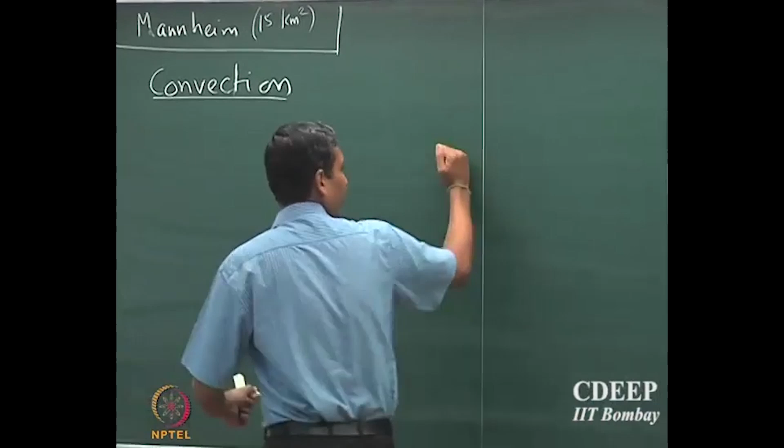Okay, so we've been discussing convection, let's catch up a little bit and then proceed further. We stopped by observing some of these dimensionless quantities. We've been discussing the analogy between different transport processes.

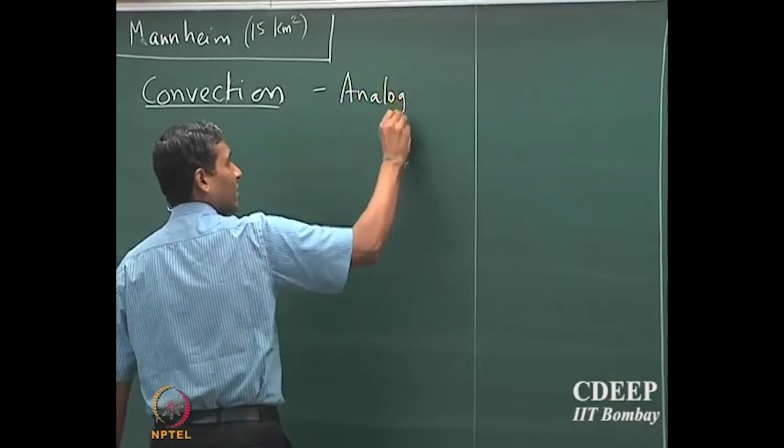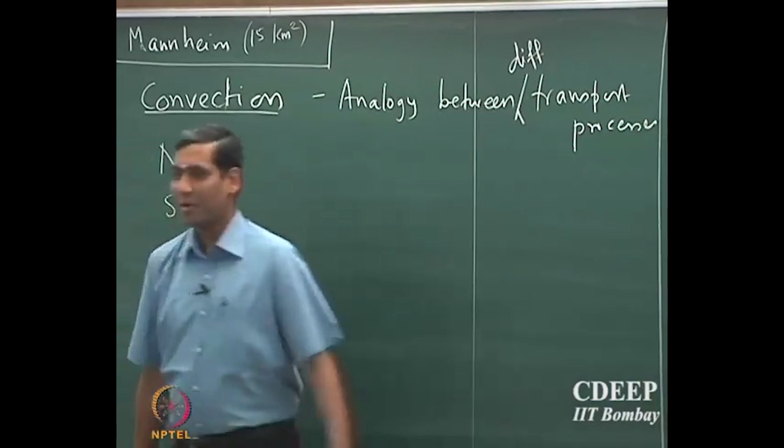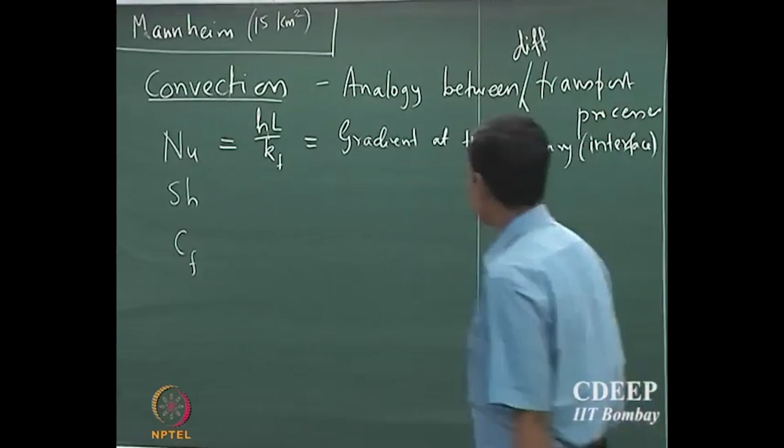So we said that we define Nusselt number. Does anyone remember? hL by k. What's that? No, it's not—it's a positive quantity. What is it? It's the gradient at the boundary—I should rather say interface. It reflects the gradient at the interface. Okay, and similarly we could write the concentration gradient at the interface.

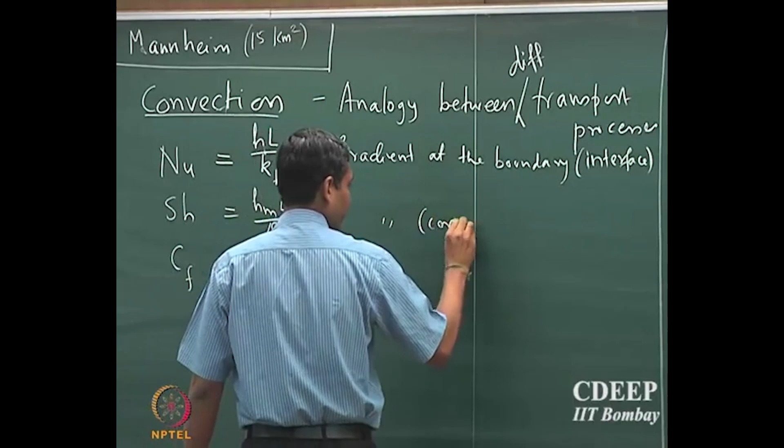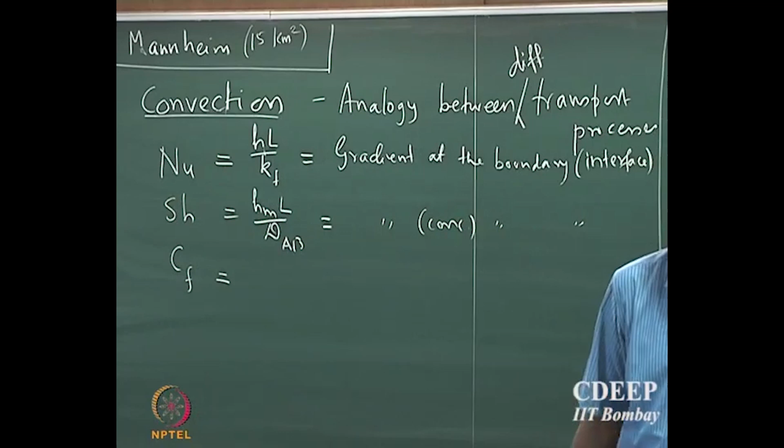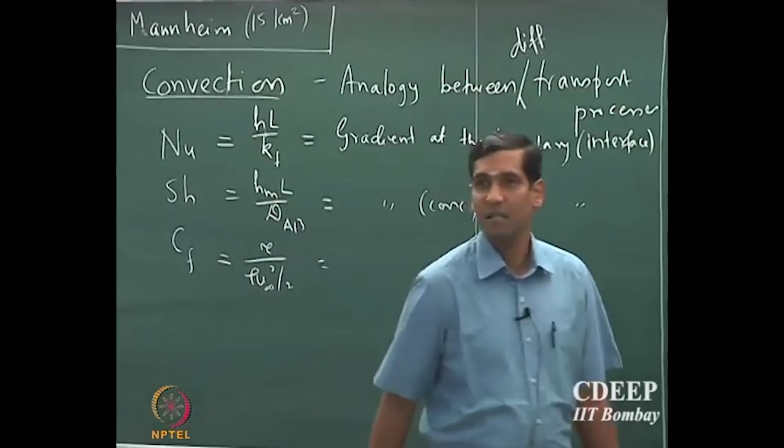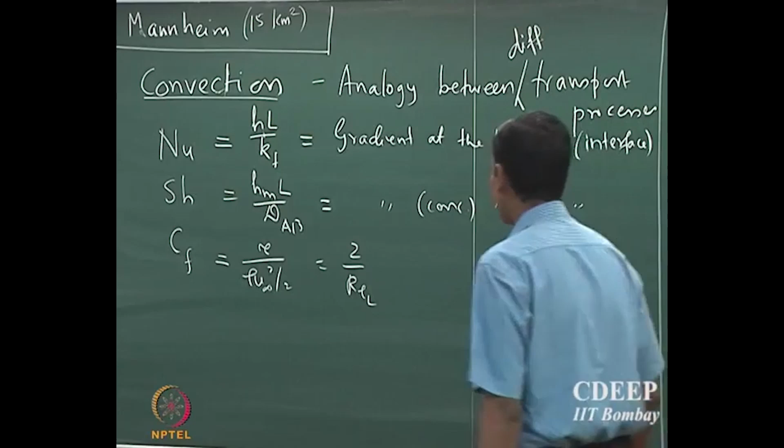What about Cf? Yeah, tau by rho u square by 2, and that will be 2 by Reynolds number multiplied by velocity gradient at the interface. Okay.

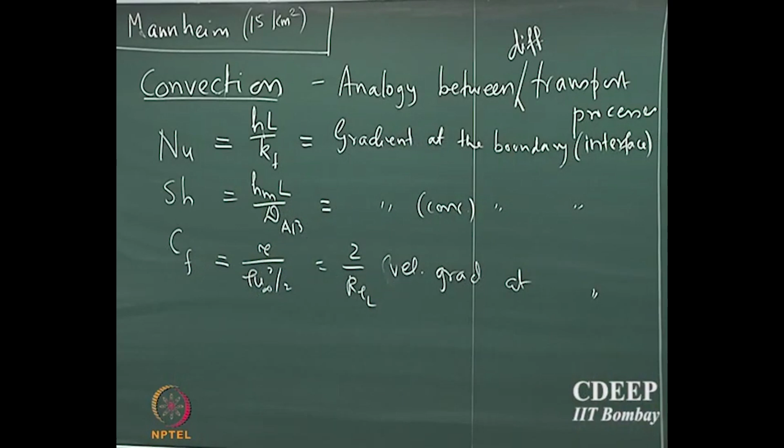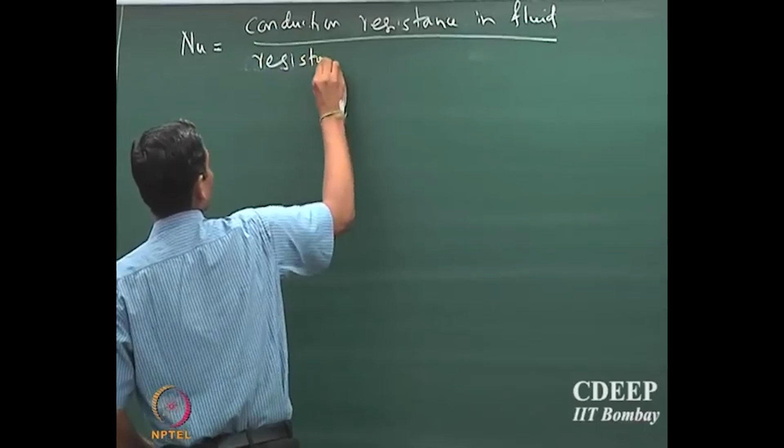But we also defined this as the ratio—Nusselt number is a ratio of conduction resistance in fluid divided by resistance to convection at, or rather across, the interface, because you are really looking at transport across the interface. And similarly, one could have a definition for Sherwood number—we will not get into that, it's anyway similar.

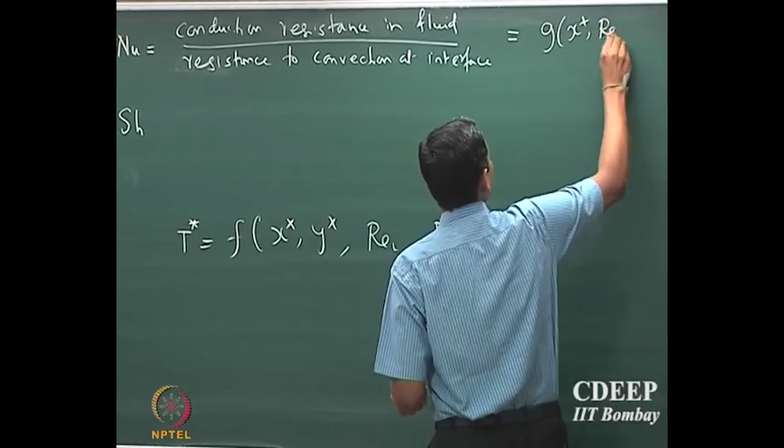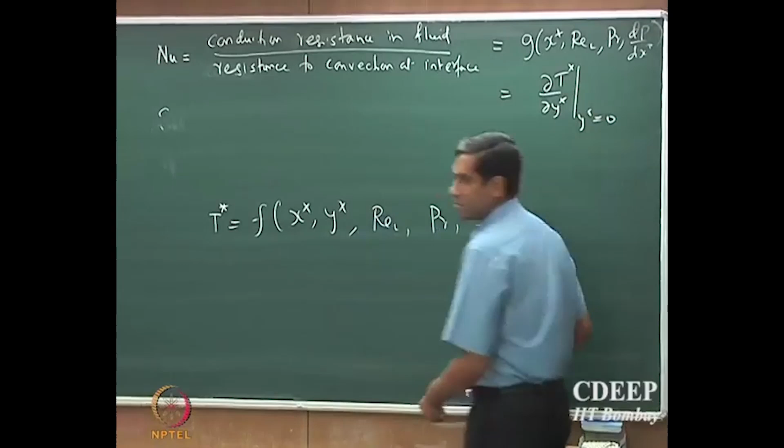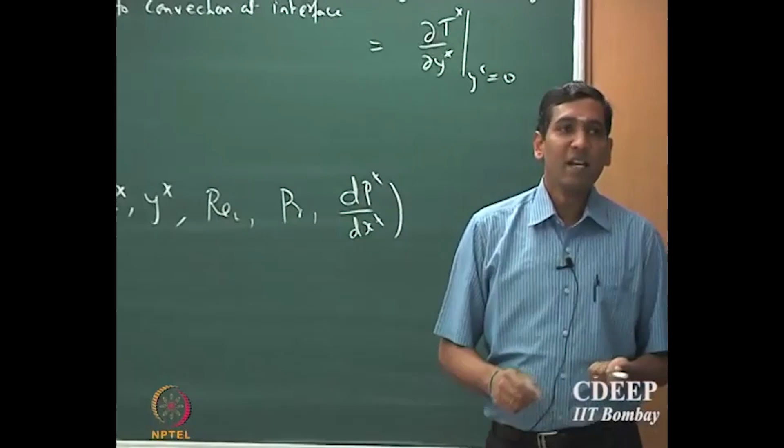Now, we also said, what is the functional form of Nusselt number? Remember we said the dimensionless temperature T star is a function of x star, the position inside the boundary layer, Reynolds number, Prandtl number, and the pressure gradient, which is typically a constant. So Nusselt number will be a function of x star, Reynolds number, Prandtl number, and dP star by dx star, because it is evaluated at the boundary—you take the first derivative. So this is nothing but dT star by dY star at Y star equal to 0. So the Nusselt number is not a function of Y position anymore, it is only a function of X position, because you are interested in the gradient at the interface, which is Y star equal to 0.

Okay, so what we are going to see today is—so far we have not solved any equations. The question is, can we get any further insights without solving the equations? We have to solve them eventually, but we are going to first try to extract as much information as possible before solving the governing equations.

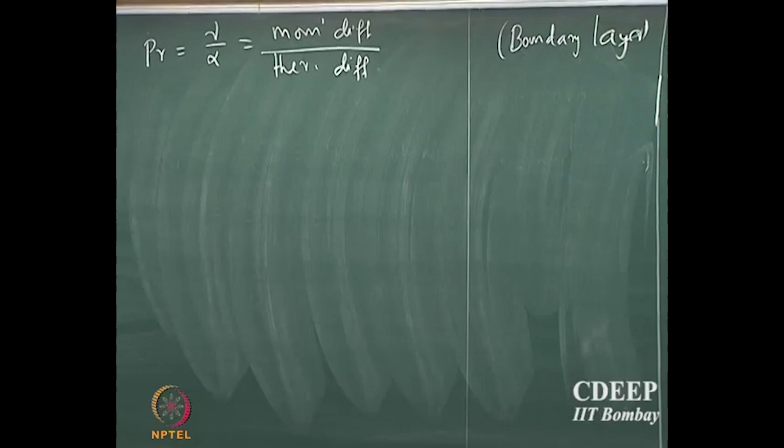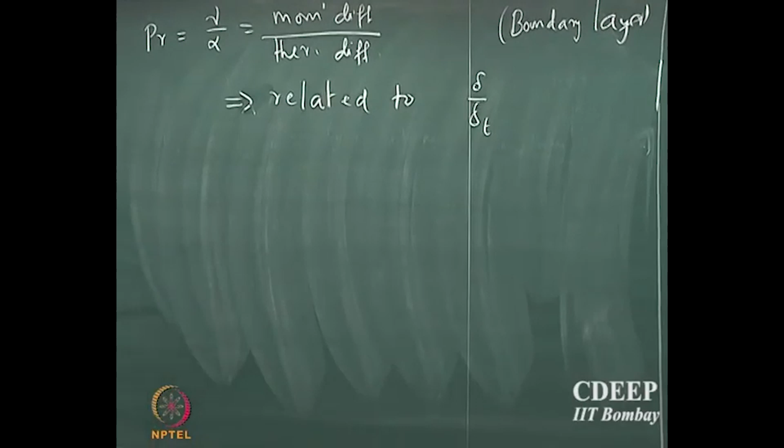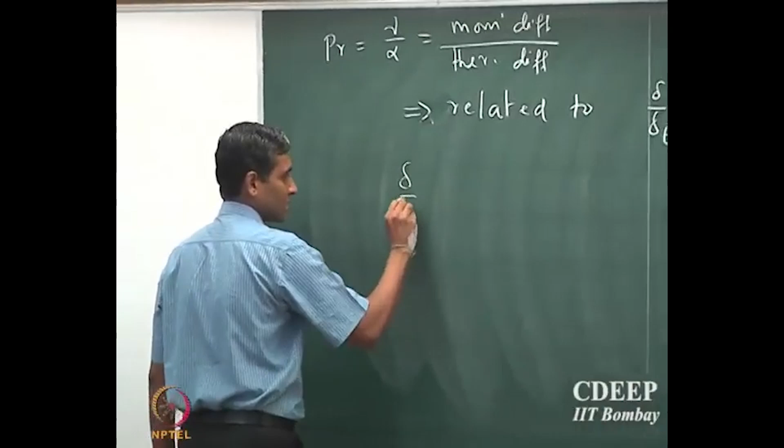So the first observation is that the Prandtl number is a ratio of nu over alpha, which is the momentum diffusivity divided by thermal diffusivity. Now, note that all of these are happening in the boundary layer, right—you are looking at characterizing the process in the boundary layer. So the momentum diffusion and thermal diffusion have to somehow be related to delta, the boundary layer thickness. The momentum diffusion is occurring in the boundary layer, and it has to be a function of the boundary layer thickness, and the thermal diffusivity has to be a function of the thermal boundary layer thickness, because that is the domain in which these two processes are occurring. So therefore, this is the general functional form.

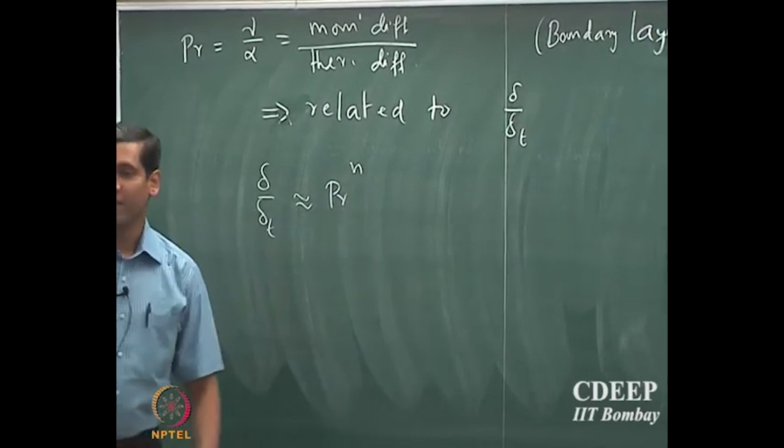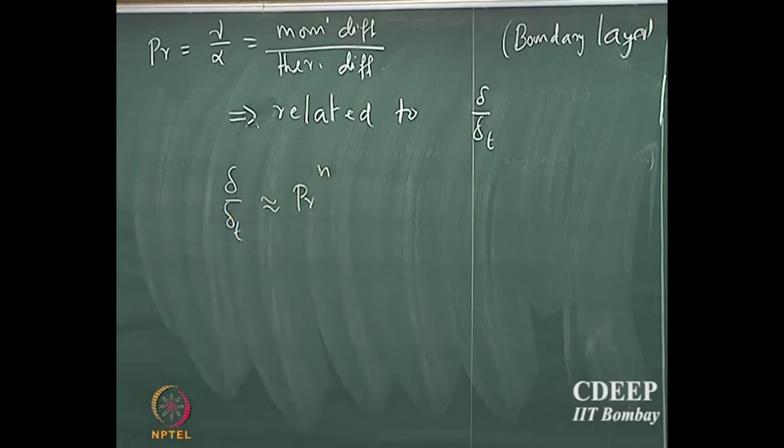We do not know what that n is till now, we are going to figure that out while we discuss different aspects of convection. So, it is safe to assume that the ratio of the momentum boundary layer to the thermal boundary layer thickness scales as Prandtl number to the power of n. Okay, we still do not know what that n is. In fact, some of you who have already done this laminar and turbulent flow experiment in the lab, you must have seen some exponent like this, and so we are going to see what that exponent is. Similarly, one could express delta by delta C as Schmidt number to the power of n.

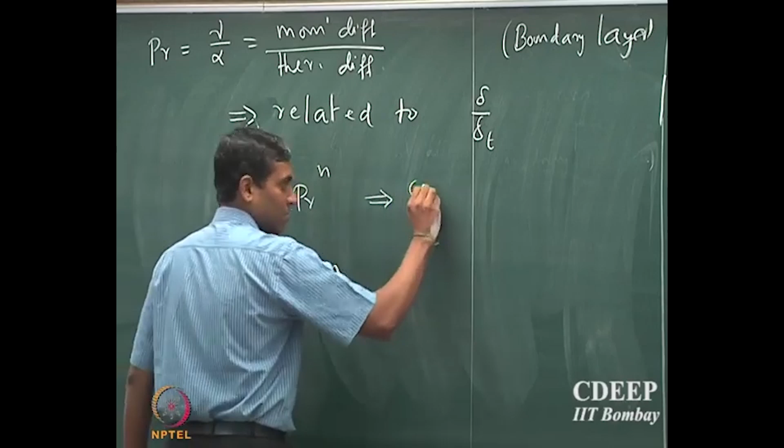So, this also provides a method to compare the boundary layer thicknesses, and same here, right. So, immediately I could take a ratio of these two, okay. I can say Prandtl number to the power of n, Schmidt number to the power of n. So, that goes as delta C by delta T.

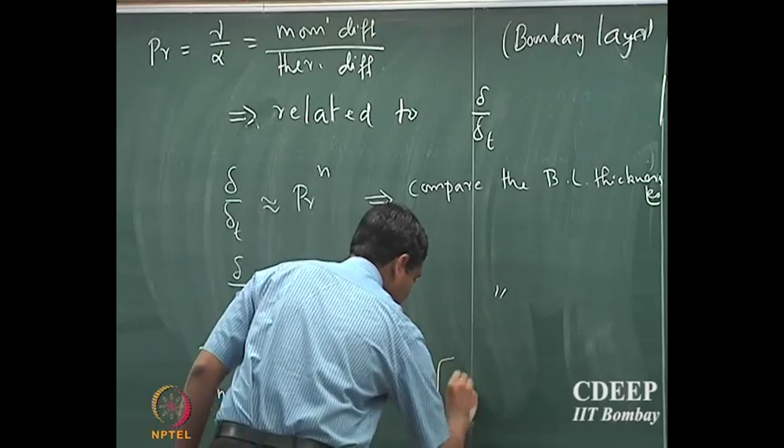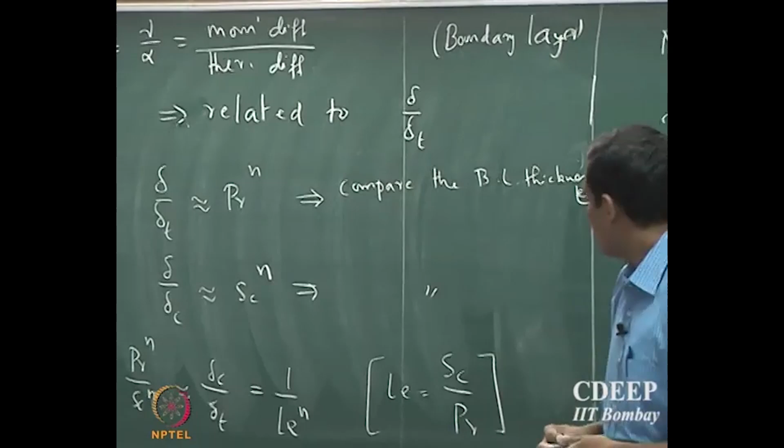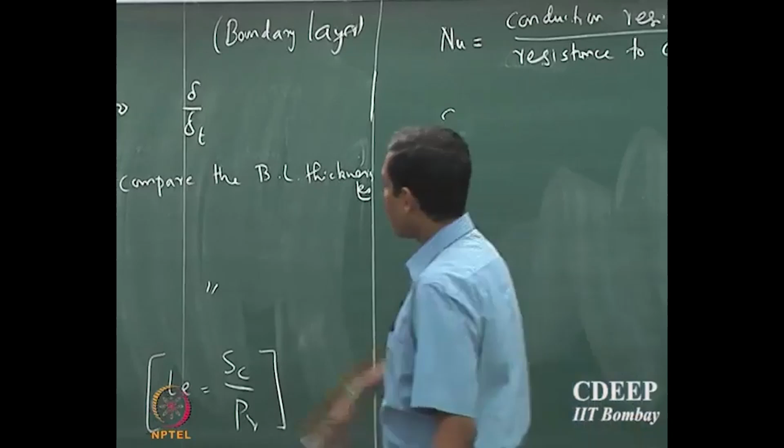Let me make sure I get the numbers right. That is called Lewis number. Okay. So, Lewis number is defined as Schmidt divided by Prandtl number. So, if we define a new number called Lewis number, what would be the definition for Lewis number? So, remember Prandtl is momentum by thermal diffusivity, Schmidt number is momentum by mass diffusivity. So, Lewis number will be thermal by mass diffusivity, okay. So, that is easy to see that.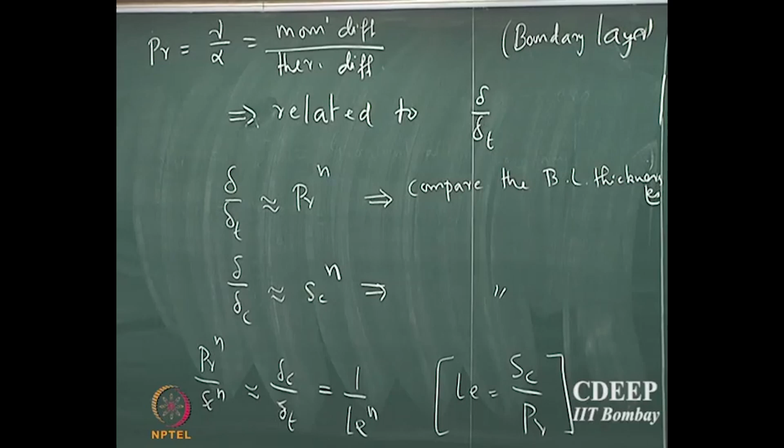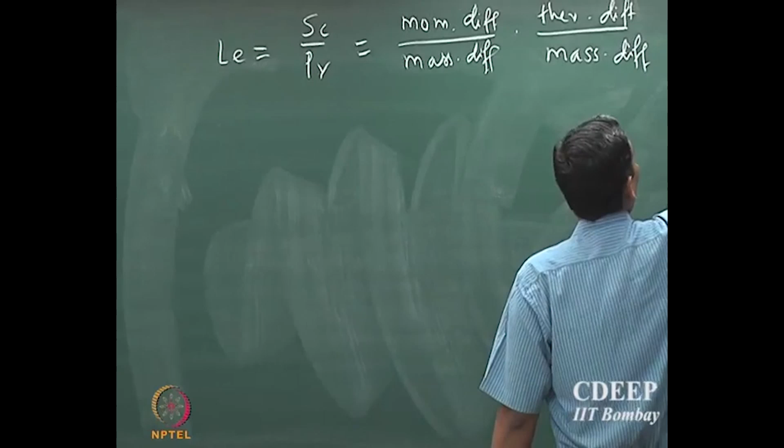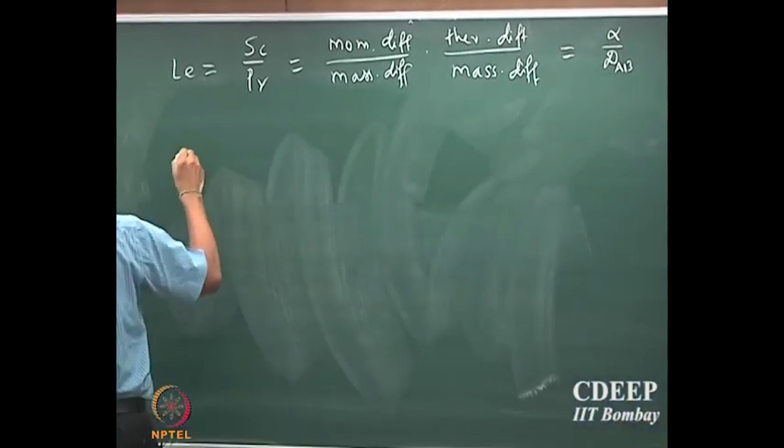So, Lewis number is given by momentum diffusivity divided by mass diffusivity multiplied by thermal diffusivity divided by mass diffusivity. And so, that will be alpha by DAB, where alpha is the thermal diffusivity of the fluid that you are considering, and DAB is the equimolar mass diffusivity of the species that is diffusing in that particular stream. So, really what we have found is that Lewis number, Prandtl number, Schmidt number and Reynolds number, okay. That is based on the length of the plate, because we have looked at flat plate, you could always consider other geometries. So, these 4 numbers essentially characterize the diffusive properties of all 3 different transport mechanisms.

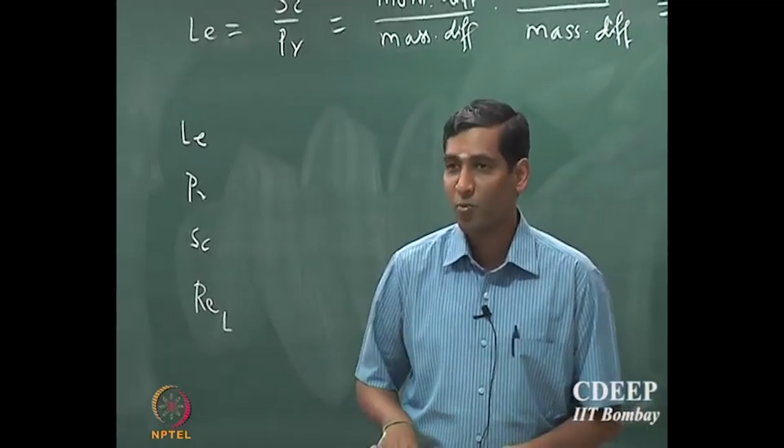So, you get a way by which you can compare all of these, which means that if you know one of them, if you know Lewis number, there has to be some relationship between the heat transport and the mass transport processes. Each of these numbers, Prandtl, Schmidt and Reynolds number, they independently characterize each of the transport processes. So, this characterizes the thermal transport or the heat transport processes. This characterizes the mass transport process, and this characterizes the momentum transport process.

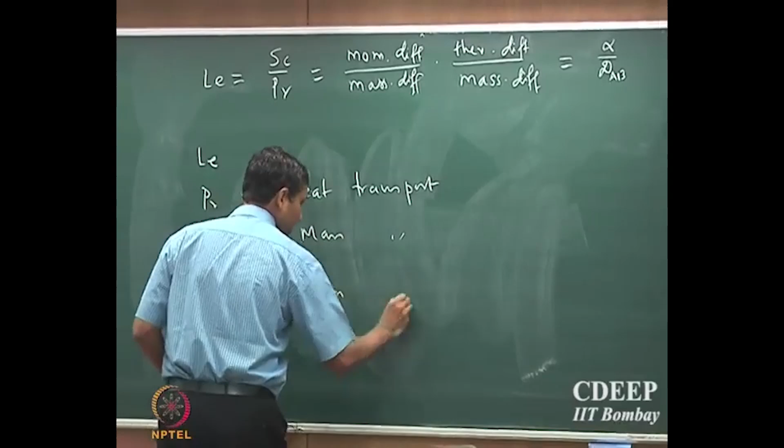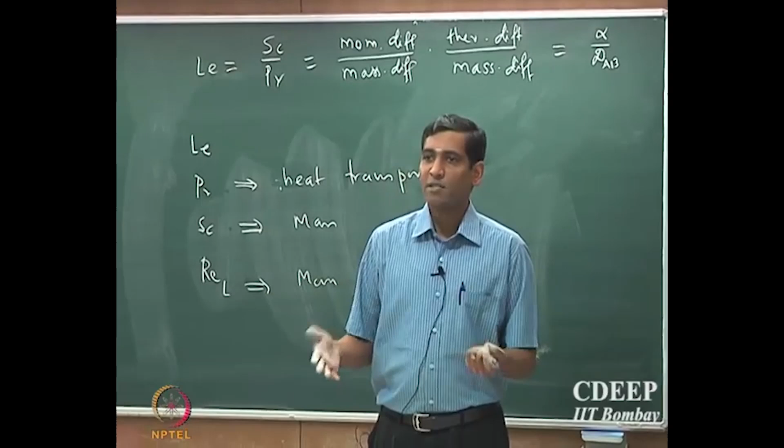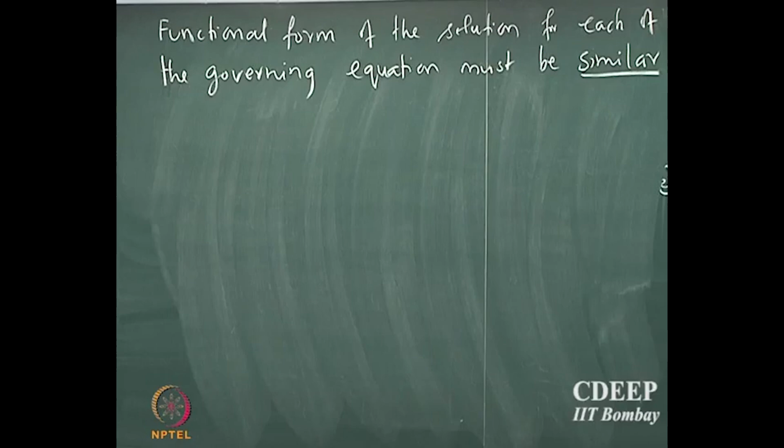Now, you may also recall that the governing equations that we wrote for these 3 transport processes, if we introduce the boundary layer approximation, they all look similar, right. They all have same terms, they have a convection term, they have a diffusion term, plus the momentum boundary layer equation has a constant, which is the pressure gradient. So, the functional form of the solution must be similar. Okay. So, it is very important to understand this, it is not same, it is similar, okay, because the momentum boundary layer equation does not depend upon the concentration and temperature, while the concentration and thermal boundary layer equations, they depend upon the velocity, although their functional form is same.

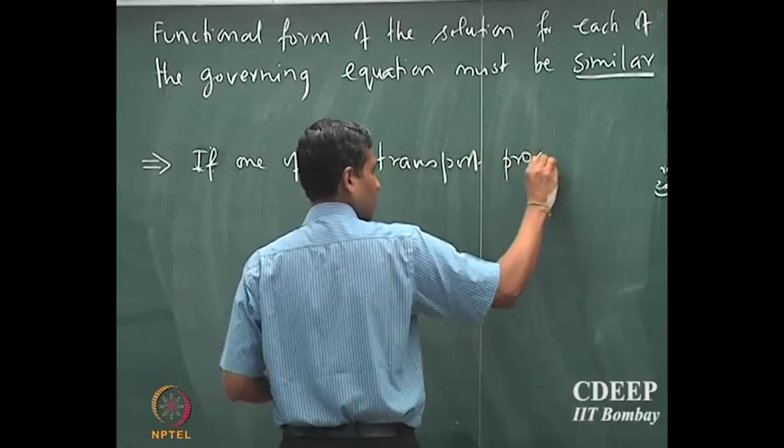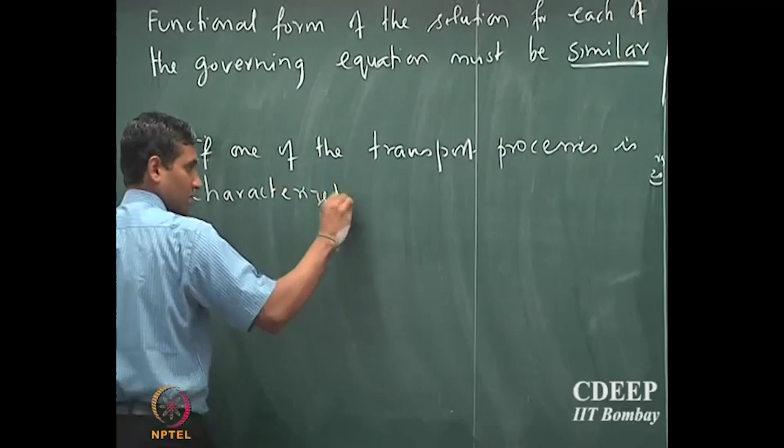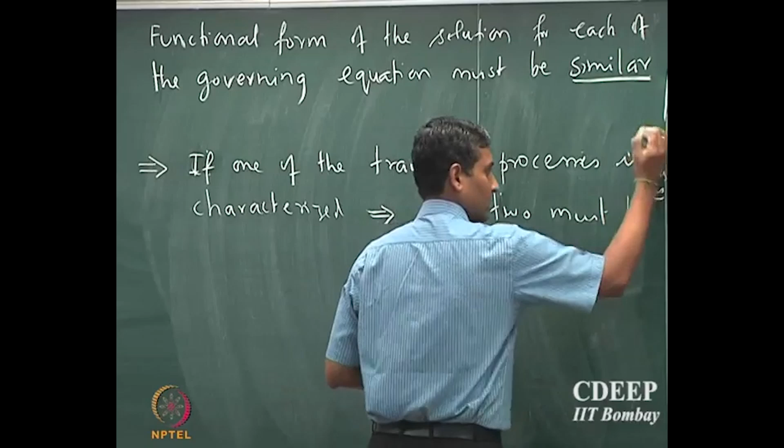So, therefore, the functional form of the solution that you get, they have to be similar to each other, which also implies that if one of the processes is characterized, then the other 2 must be similar, okay. So, that also means that because the functional form is same, if one of the transport processes is characterized, if I know how to solve one of them and I found the functional form and I found these dimensionless numbers, then I'm done. I should be able to find the solutions for the other two. Okay. So it is this property which leads to the concept of the boundary layer analogy.

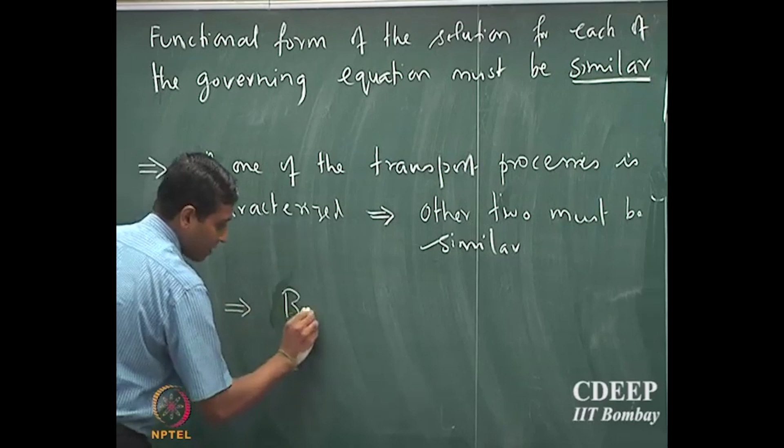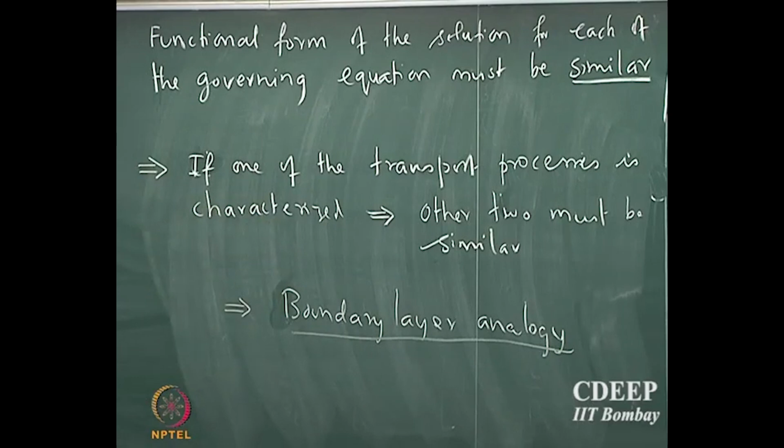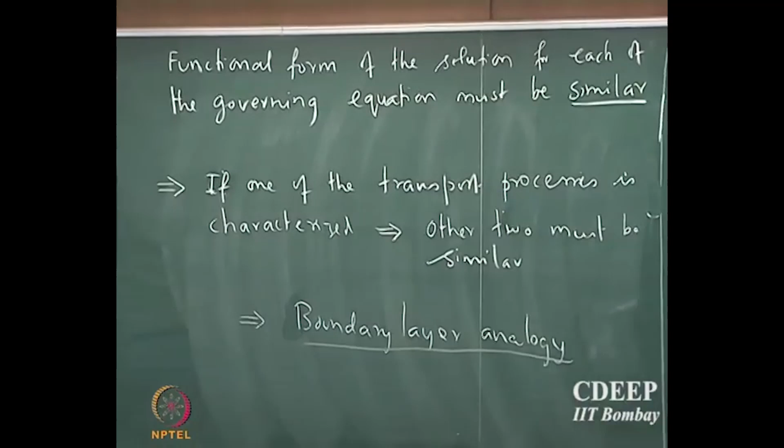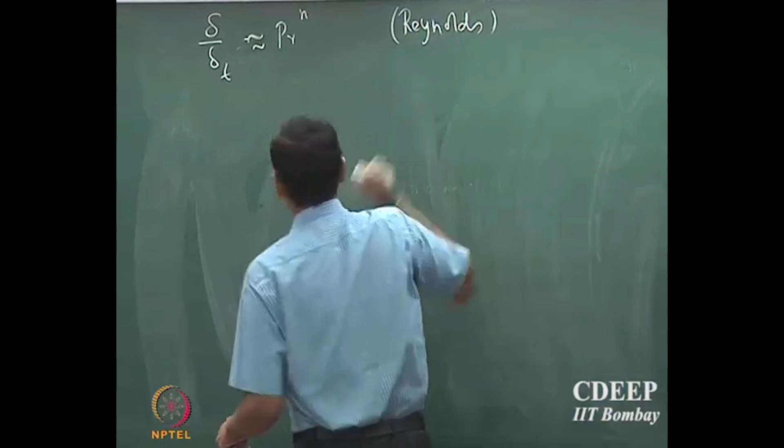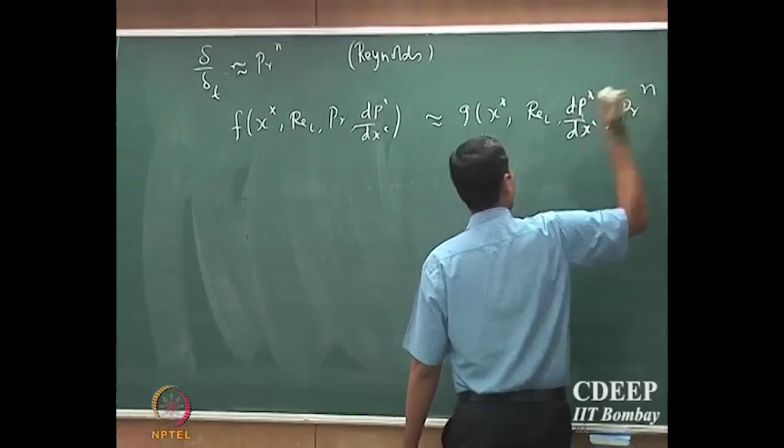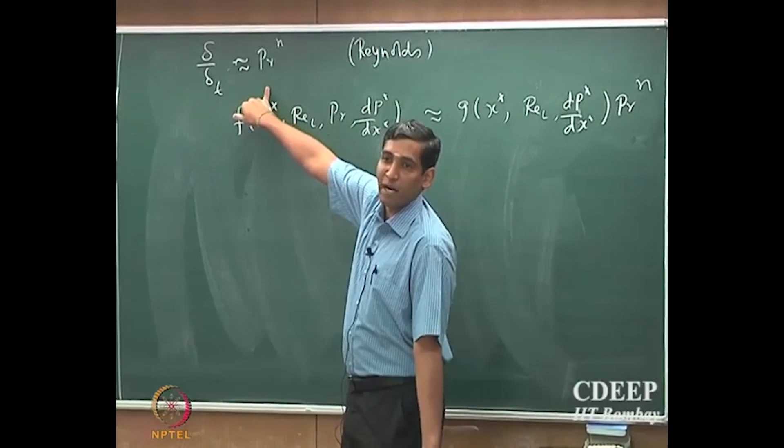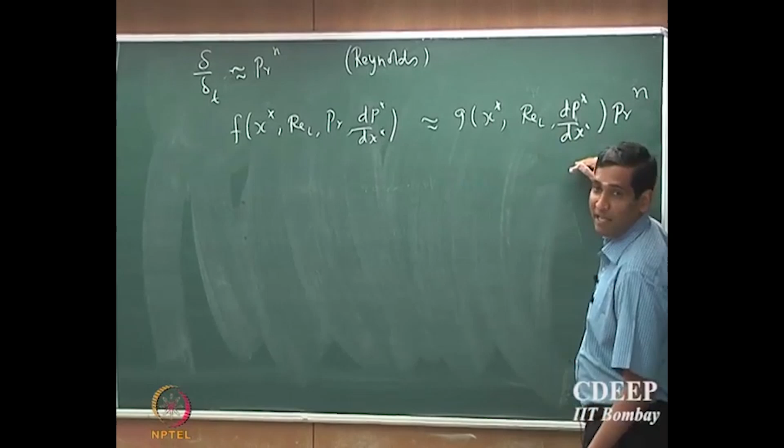So it scales as some function multiplied by Prandtl number to the power of n, and in fact that observation is because of the positing that the ratio of boundary layer thickness scales as the Prandtl number to the power of n. This may appear very heuristic right now, but in subsequent lectures you will see that almost all the geometries and problems you consider give this kind of scaling. So for now we will assume that this is the scaling that you will get.

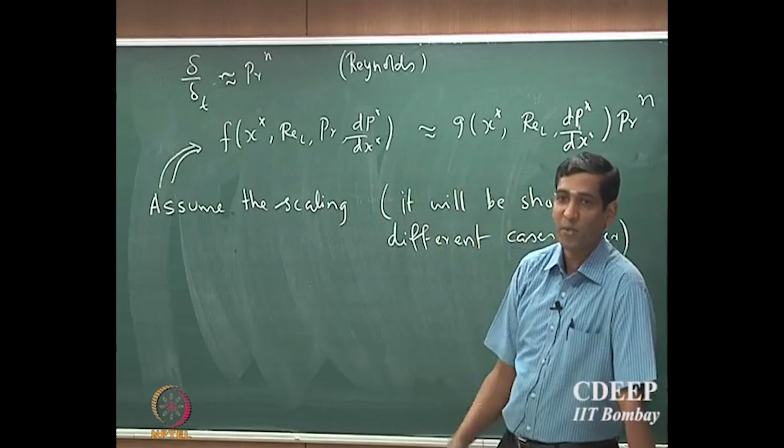Assume this scaling, for different cases later. By the way, this has been experimentally shown very well. There are some nice experiments that have been performed where you can see this kind of scaling observed experimentally for different kinds of problems.

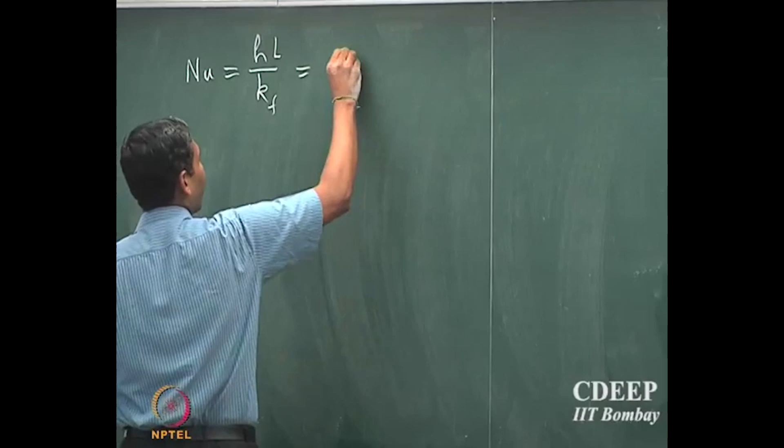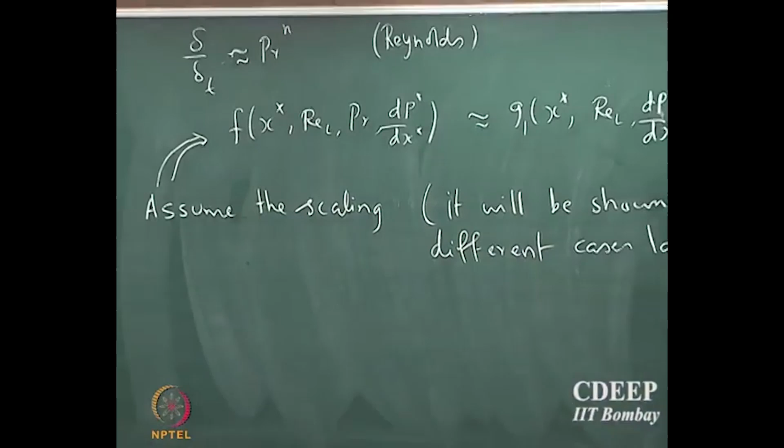So similarly, we said that the Nusselt number, which is h into L by kf, is given by some functional form. If I call this g, function of x star, Re_L, and Prandtl number, that turns out that it scales as...

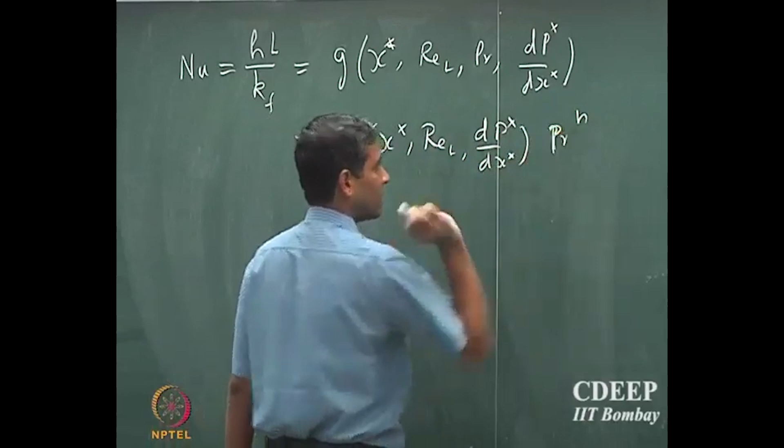dp star by dx star into Prandtl number to the power of n. That's because the functional form, the Prandtl number to the power of n, scales out as a separate entity. So we should be able to write Nusselt number simply as some function g1, which is a function of x star, the x position, the Reynolds number, and some pressure gradient, multiplied by Prandtl number to the power of n.

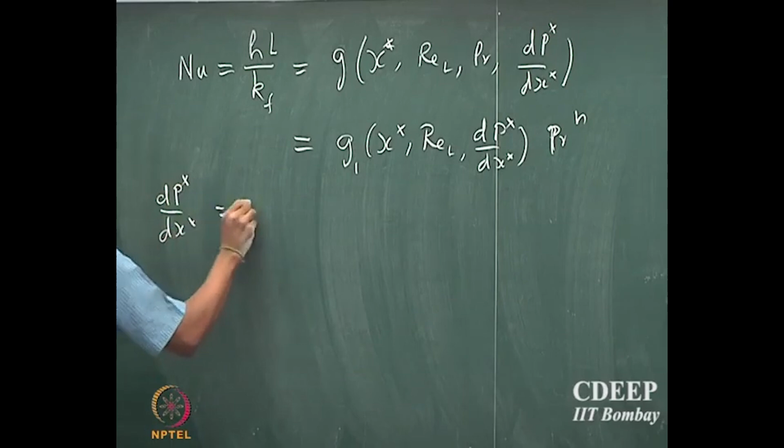So supposing dp star by dx star is constant, which is a fair thing to say, Nusselt number can simply be written as x star, Re L, into Prandtl to the power of n. Similarly, we could say that Sherwood number will have the same functional form: x star multiplied by Schmidt number to the power of n.

Any questions? Because the heat transport and mass transport in the boundary layer are related to each other.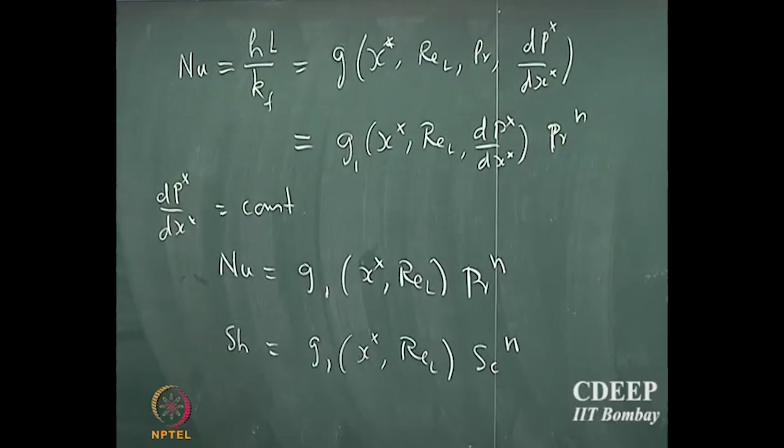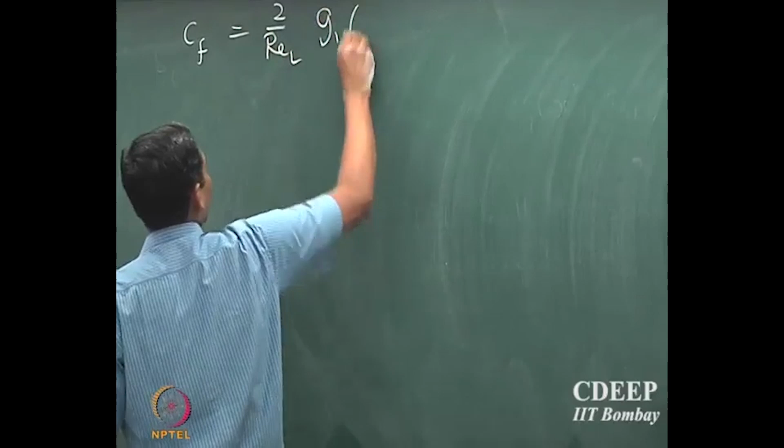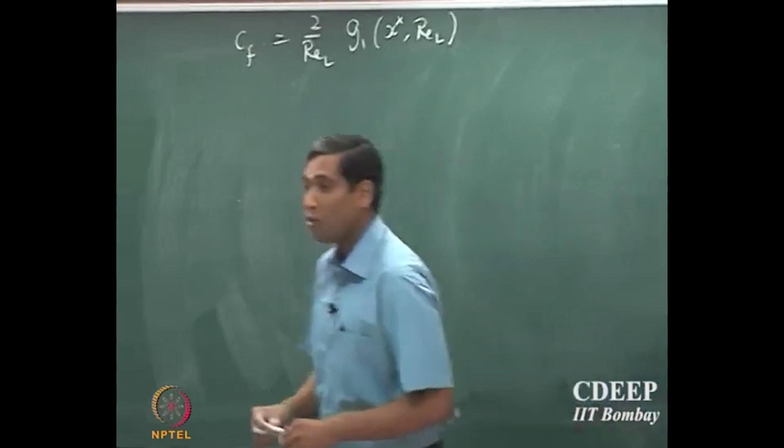For the momentum boundary layer, we said that the friction coefficient is given by 2 by Reynolds number into the same functional form, G1 of X star, REL. Now, if I am going to relate these three, how do I know what this functional form is?

This functional form would be just G1. The reason is that if you remember the model equations, the scaling in front of the diffusion term in the momentum equation is 1 by REL, in the heat transport equation it is 1 by REL into 1 by Prandtl number, and in the mass transport equation it is 1 by REL into 1 by Schmidt number. That is why the functional form will be the same.

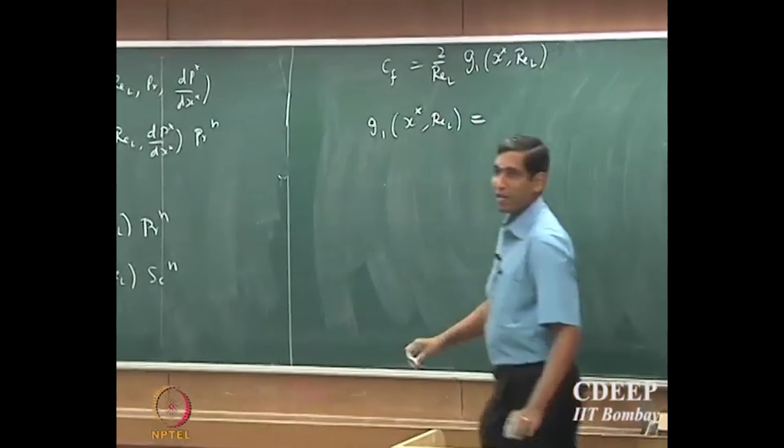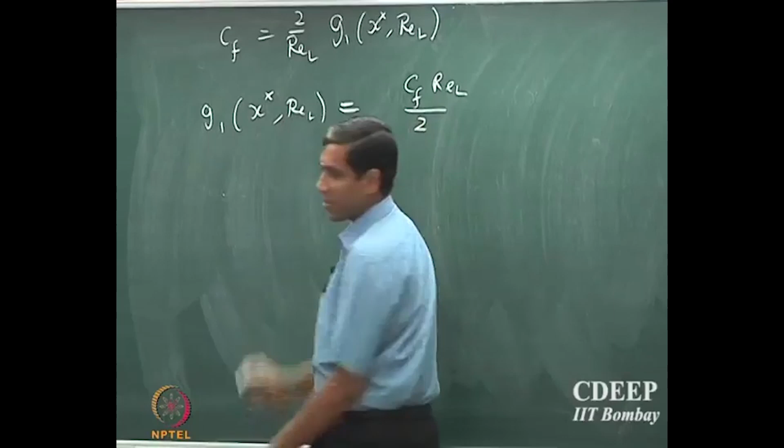So now we can relate these functional forms. We said G1 of X star, REL, that should be equal to CF REL by 2. And suppose the Prandtl number and Schmidt number are 1.

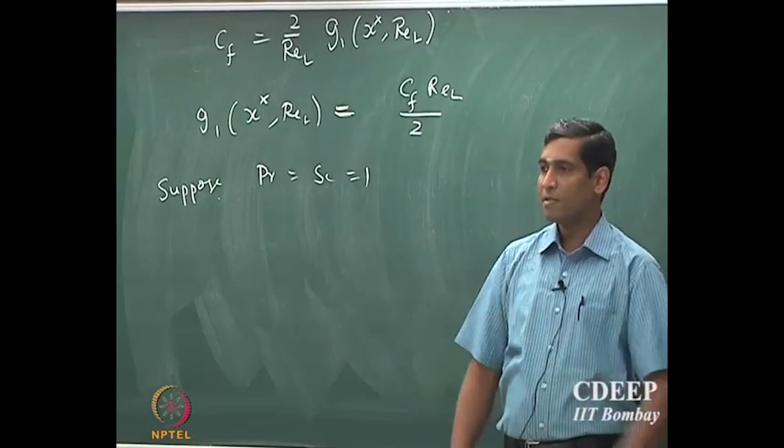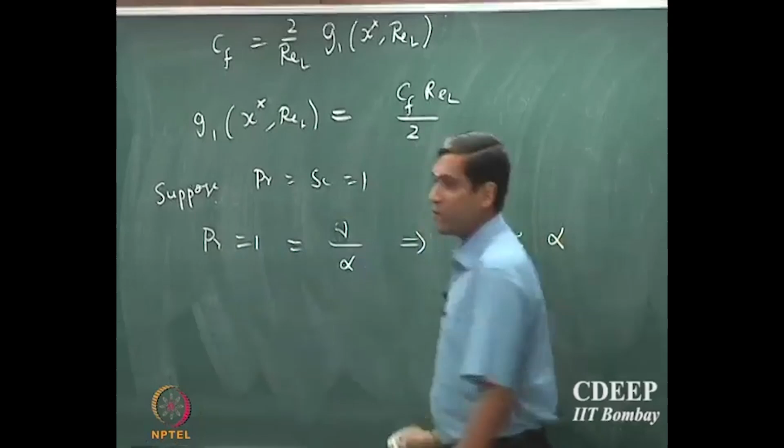When can Prandtl number and Schmidt number be 1? When can you have delta T and delta same? When Prandtl number is equal to 1, remember that it is nu by alpha, momentum diffusivity by thermal diffusivity. So this being 1 means that the momentum diffusivity is almost equal to thermal diffusivity. When is that the case?

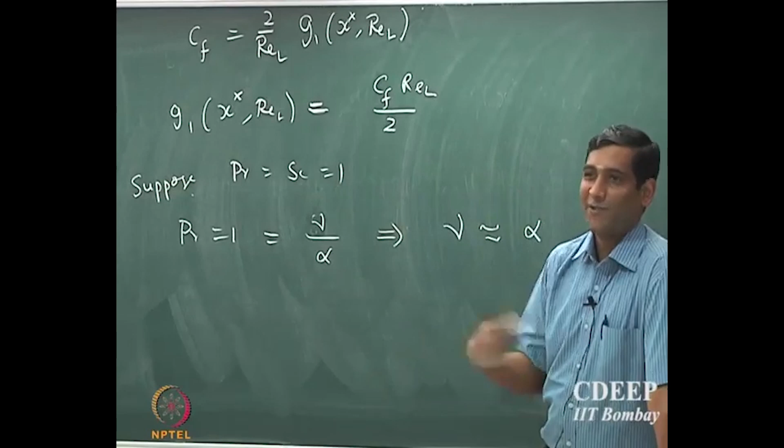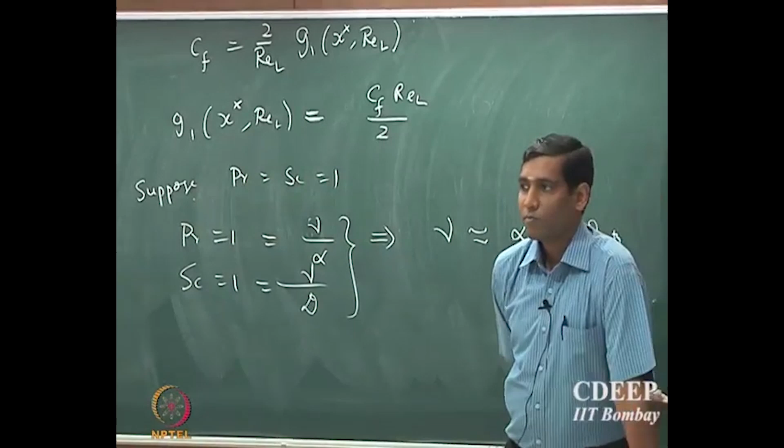What kind of systems will have momentum diffusivity and thermal diffusivity equal? Or let us say momentum diffusivity, thermal diffusivity, and mass diffusivity — I said Schmidt number also is equal to 1, which is nu by D. What kind of systems will have that? Does anyone know an example of when the momentum, thermal and mass diffusivities are almost equal?

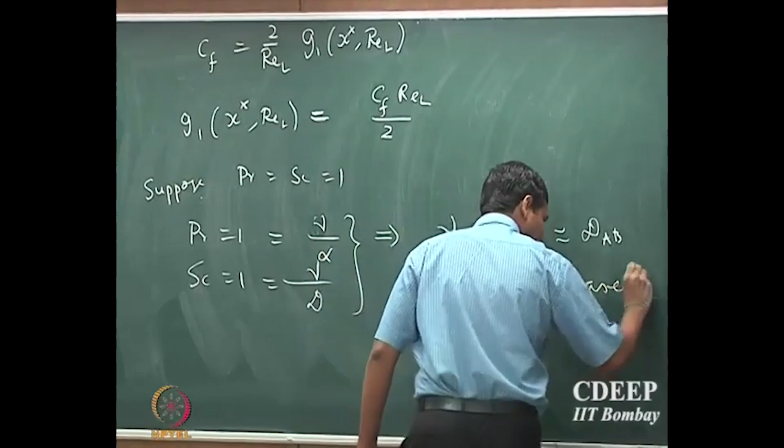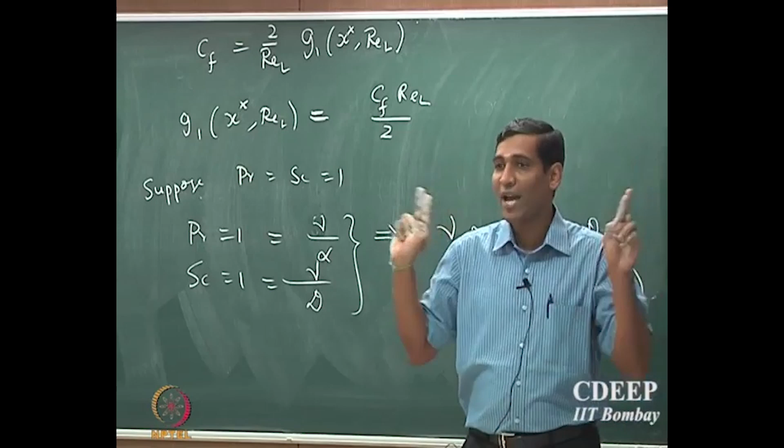It is dilute gases. When you have a very thin gas stream, if you measure the properties of this thin gas stream, it turns out that these three diffusivities are almost equal. They are not exactly the same, but they are almost equal. So in those cases, the Schmidt number and Prandtl number are almost equal to 1.